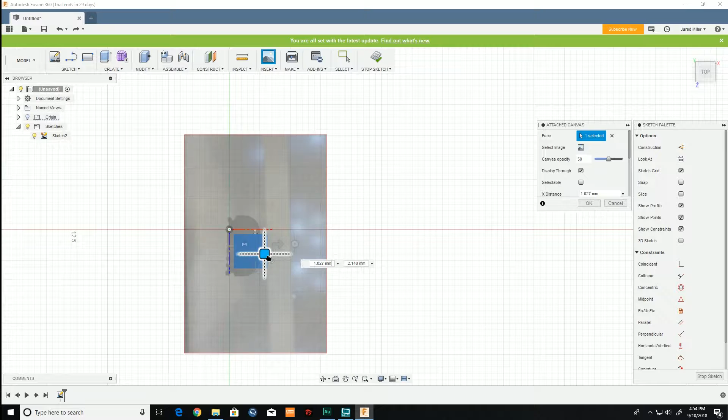Okay guys, so here we are in Fusion 360. All I'm doing is importing the photo that I took, making it about 50% transparent so I can see through it, and then orienting it along the red line there.

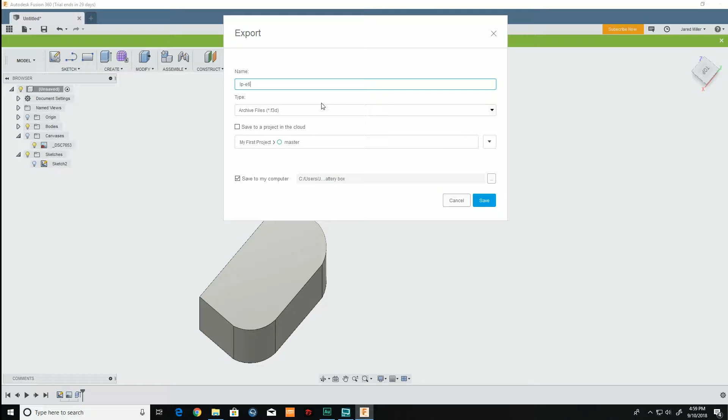I'm going to scale it up a bit, make sure the scaling is proper, and then trace around it. Then I'll create an entity and extrude it out to the dimensions I need for the battery. After that, I'll export this as an STL file.

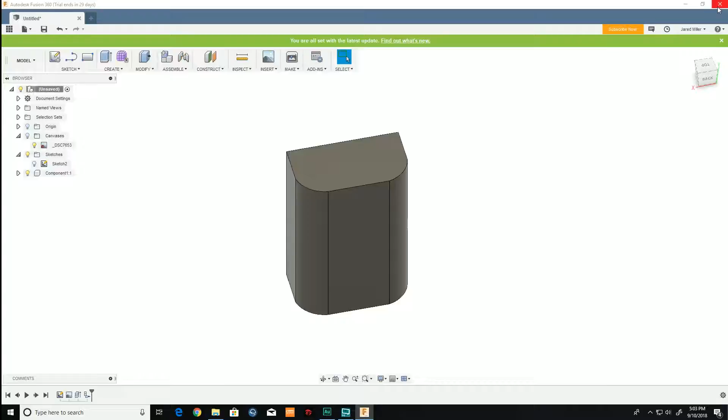Alright guys, so here we are in Tinkercad now. I just import the STL that I exported from Fusion 360. Don't mind my computer, sorry I'm going real quick through these videos - I don't want this video to run on too long.

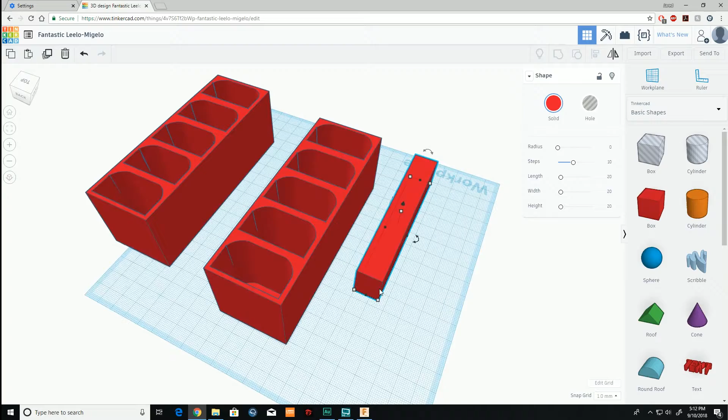All I'm doing is importing this battery, orienting it in the proper direction, then creating 5 of them, then creating a box around them.

So I'm going to lift the batteries up off the plane a little bit, then use the tool to make a cutaway with the batteries, so the batteries cut into the box. That leaves you with a perfectly matched hole for your batteries to go into. Then I'm going to make a cover for it.

Like I said, this one took a little bit of back and forth. I ended up printing it twice - also my power went out, so technically it's 3 times altogether. I just had to quickly remove the other one and get it printing again.

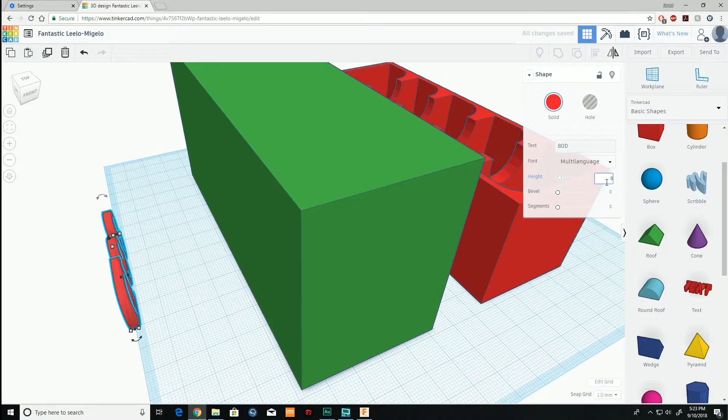So I'm just going to write 80D on the side of the box so I know which camera these batteries go to. Then we'll send this over to the Octoprint server and get these printed.

So let's go ahead and watch some time lapse. Again, sorry about the quality, I'm just using the Logitech camera on the Octoprint itself as the time lapse for this video.

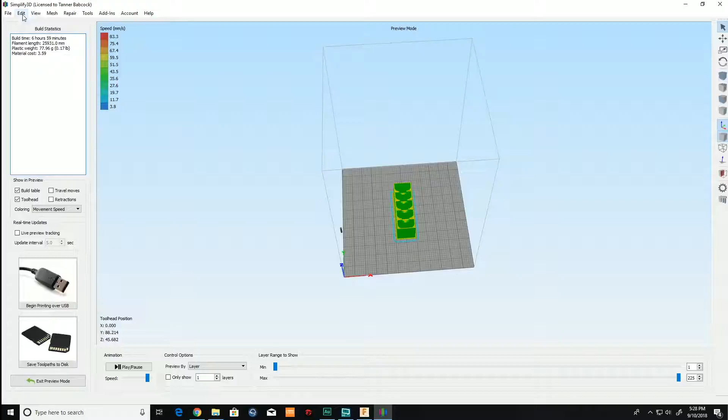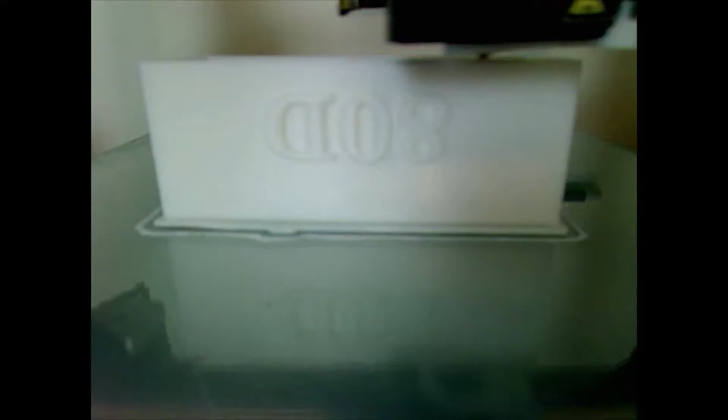Alright guys, so here it is, this is the finished product. I had to do a little bit of extra tweaking - forgot to take into account that when you make a lid for something just by doing a push-pull, you have to account for the extra 0.4 to 0.6 millimeters of extrusion from when it actually places the plastic down. So the first lid I printed was too small, it would just sit on top. But I got it pretty well dialed in, so it sounded pretty good.

With PLA, as you work stuff in and out, it gets a little bit easier. But the main box itself holds 5 batteries, they're a perfect fit - no rattling around really, a little bit of side to side but front and back it's perfect. So using a drawing or picture when you make your template and then measuring it out really works well for me.

But I am overall very happy. It's actually been a couple days since this finished. You're looking at about a 24-hour print for both pieces at the settings I use - about 12 hours, give or take, for the top, 12 hours for the bottom. But like I said, I am happy with it.

I took this with me over the weekend for a shoot, went on a little trip to a buffalo mozzarella farm, and it was nice to just have the batteries in the bottom of my bag. All I do is look for the white box, and it was good to go.